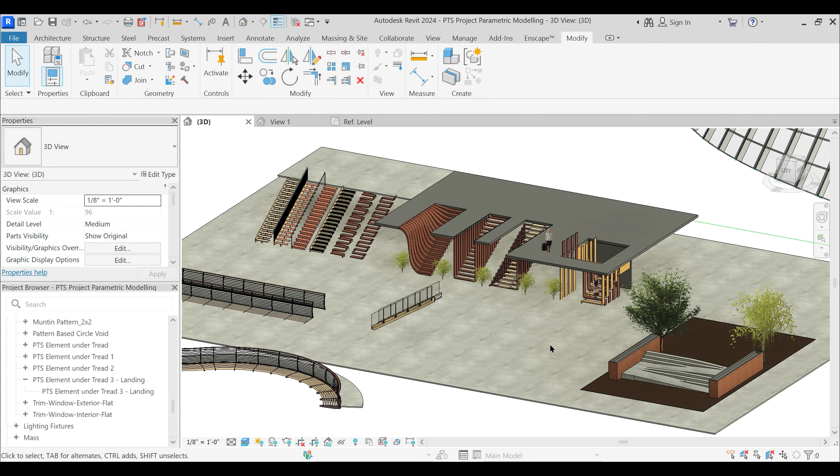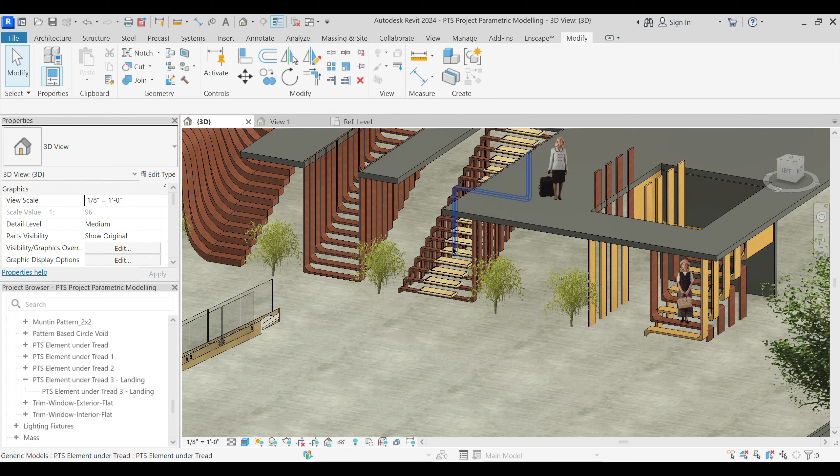For the architectural segment, I have already shown you in class different types of staircase, how to create these different types of staircase using modeling skills and different template files of Revit. Fine, but while in this process, you always update and learn new things. So I have recently just discovered this different type of staircase using the same template file with the help of which these two staircases have been created.

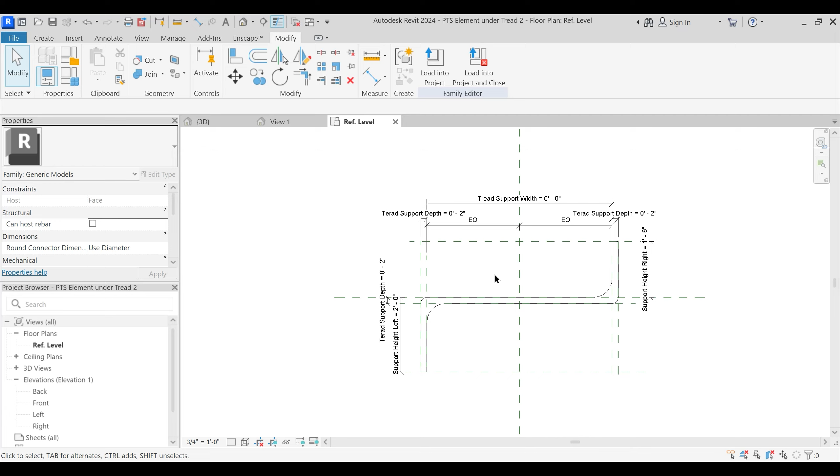That is the face-based family, but using a slightly different modeling skill. For example, if I just take you to this particular edit family, then what you see is that this is also a face-based family which has been created while assigning and constraining it with several dimensions and parameters, and then that particular file has been loaded to the project environment and used in a slightly different way to create this particular type of staircase.

So that I'm going to show you today from scratch. So just watch the entire video till the end. And if you think that this video was worth it, then kindly enroll for this course and let's learn together and let's grow together. And now without wasting a single second, let's jump into the interface of Revit.

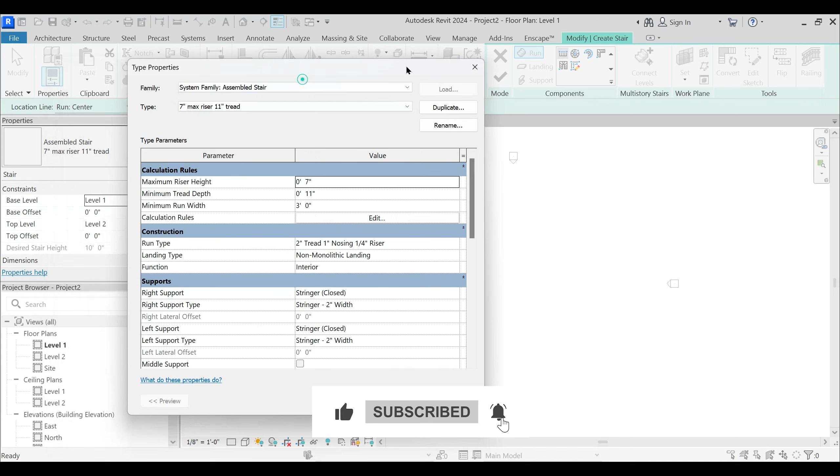Let's open a fresh new project file wherein I'm going to show you that particular staircase from scratch. Fine. So I will just click this particular stair command and we are just going to use this assemble staircase that comes with Revit. But I'm just going to say that I don't want the right support, neither the left support, and neither the center support.

And also for this run type, I'm just going to say that I don't want the riser. Yes, and I want this to be tread thickness 2 inch. That's fine. Tread profile default and nosing length 0. Fine. And with this customization, apply and OK.

And apply and OK. I'm just going to create a simple dogleg staircase with two flights, that is 1, 9, and here in this also.

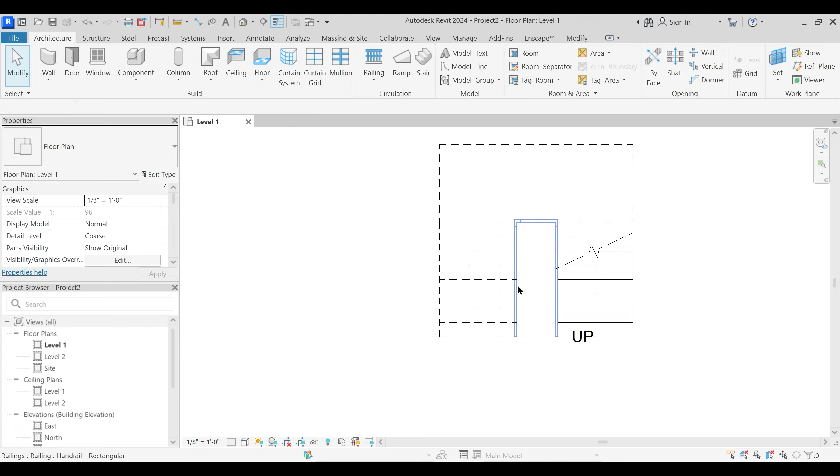Okay, and we are just going to create that particular staircase. And what I'm going to do is that I'm just going to use this particular staircase as a reference to create the one that I just showed you.

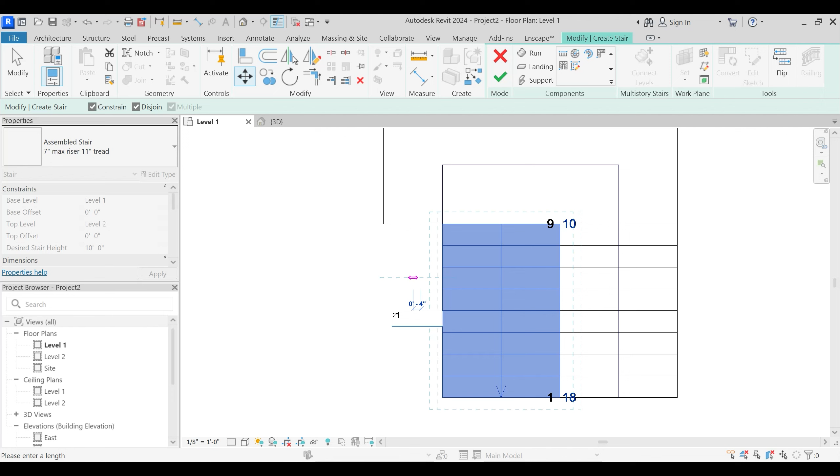So I'm just going to level 2 and edit stairs. And I'm just going to take this flight and move it just 2 inches away. Yeah, that's fine. This distance should be 2 inch. Yeah, okay, that's okay. And I'll just edit this particular landing and just bring it here and flush it. Fine.

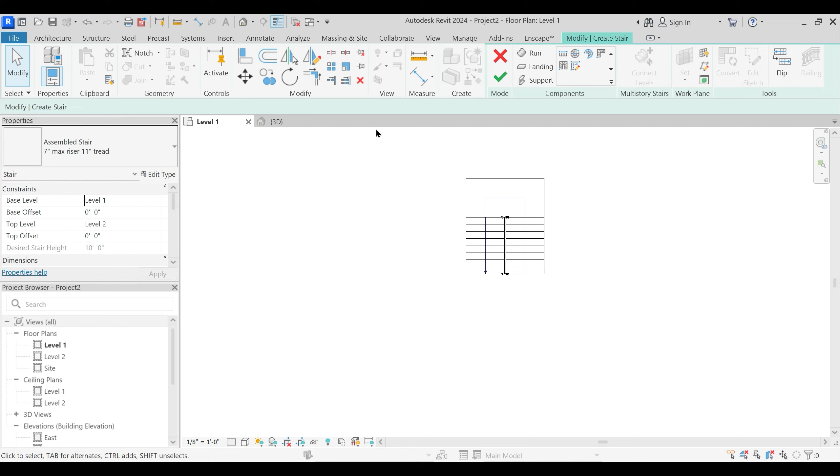Okay. And now we are going to create that particular stair element, which we are going to reference onto this particular staircase. Fine. So I will just go to file and new and family. And this is going to be a face-based family template, English Imperial. And again, just generic model, face-based. Fine. It is just going to be a face-based family.

Okay. So if I just take you to this particular 3D, and this is nothing but just a box showing this particular face, which you cannot delete. But what we are going to do is that we are going to model onto this particular face in plan while assigning several parametric formulas and constraining and giving dimensions.

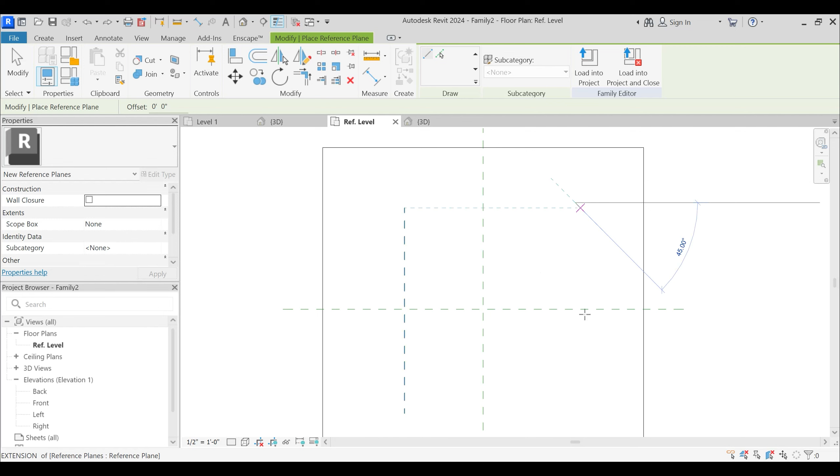Okay. So let me just draw a couple of reference planes and also one over here.

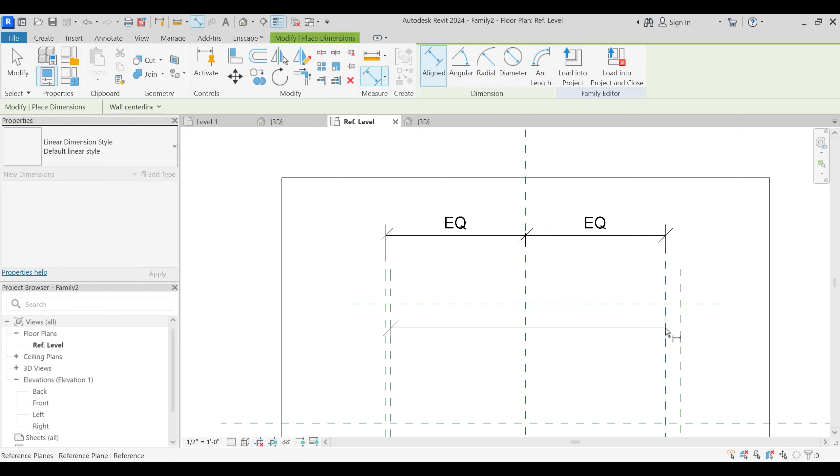Okay. Now I'm just going to dimension them. Let me just do 1 to 2, 3, and equals, and 1 overall. And let me just scale down a bit. Okay. And this is going to be stair element width.

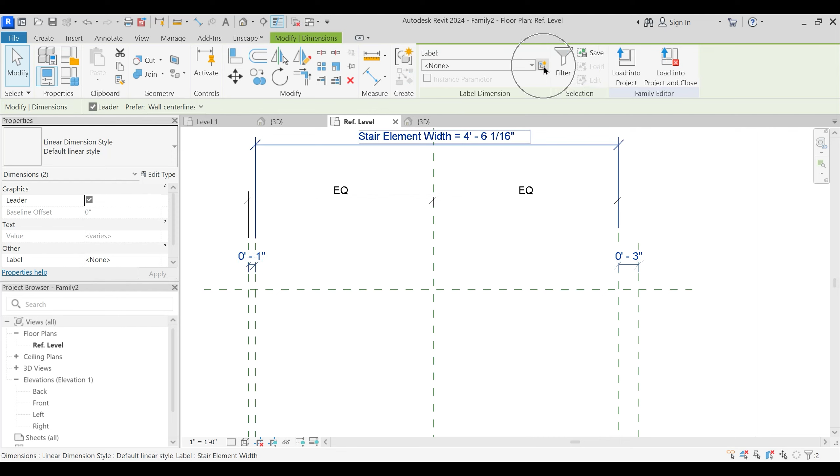And this 2, 1 to 2, and this, both of this are going to be stair element depth. Fine. And also this is going to be the same. Actually, this should be thickness, but since both of them are going to carry the same dimension, so I will just give it that stair element depth.

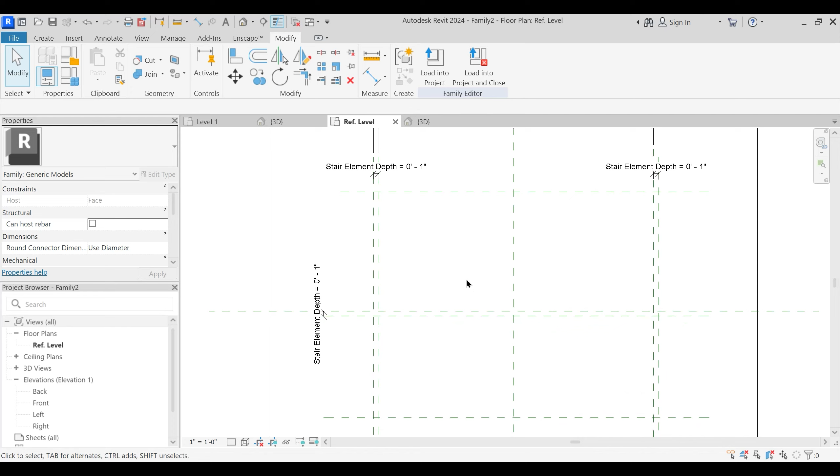Okay. And I will just strike one more parameter. And this would be, actually, let me just confirm without proceeding further. Yeah, that's from here. Okay. And that should be stair element height left, because it's my left.

And very important, okay, fine, we'll do that later. And stair element height right, because it's my right.

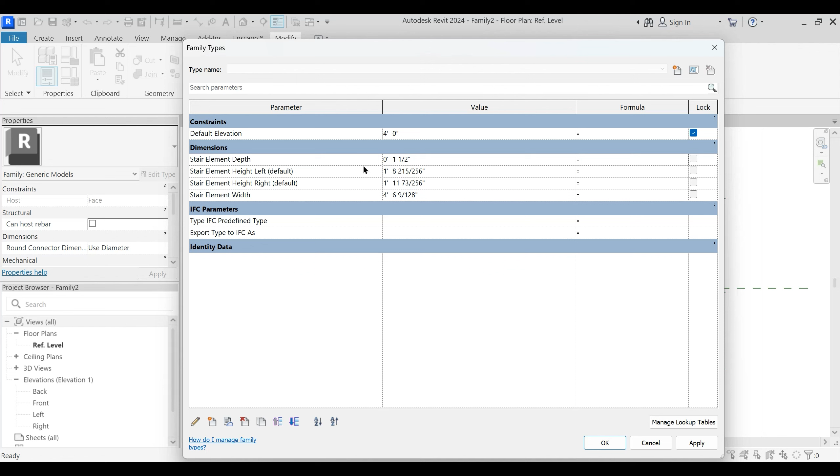Fine. And I'm just going to change both of this, right and left, these two parameters to instance parameters. The reason I'll show you once we load this particular file into the project environment, why these two parameters are instance. Okay. And depth, I will just say that I want 1.5. Okay. And width, I will say that I want it to be 5 feet.

Apply and okay. Fine. Now onto this, I'm just going to create a simple extrusion. So set work plane, and that would be the reference level. Fine. Since we are creating on that particular face, the face of that wall.

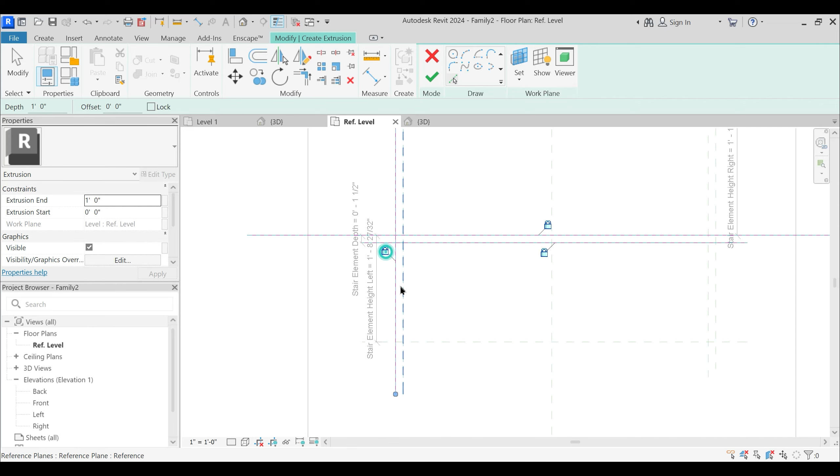So extrusion, and just create one and lock, two, lock, and I will just lock all of this to that reference planes. Fine. And also let me lock this. Yeah. Okay. And just have a close shape.

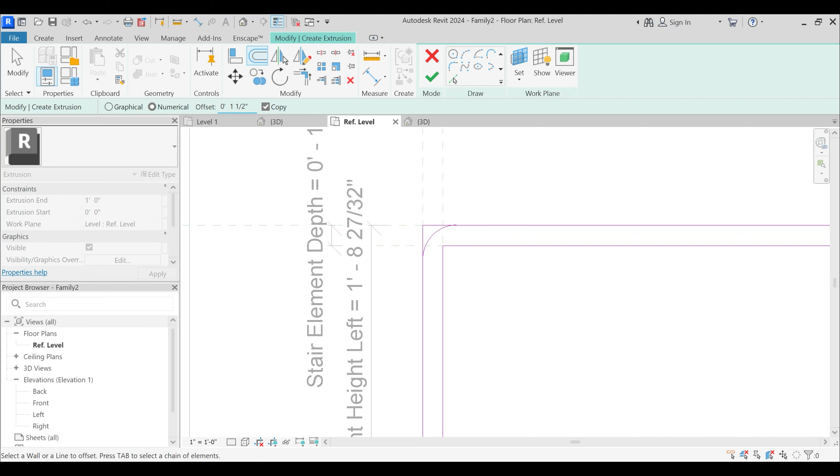Okay, what we want is a little bit of curvature onto this particular portion. So what I'm going to do is that from here till here and just a little bit of curvature. Again, offset 1.5 because the depth is 1.5

and offset it on this end. TR, okay, and select both of this and DM, that is mirror from this point, and also we need to mirror it. It got removed from here.

Okay, fine. Let's draw one line here and let's also draw one line here, which we are going to use in order to mirror that particular thing. DM, and with copy checked, I will just mirror it here, and then while selecting this, I'm DM and mirror from this point. But this time I will uncheck this copy.

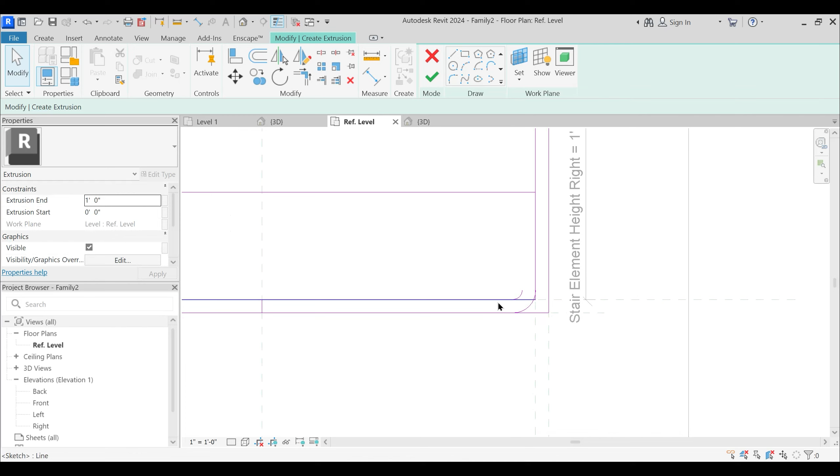Okay, fine. And I guess that we need to move it. Okay, and TR and fillet and just complete this shape.

Okay, with this I will just set extrusion 1 to be 0, extrusion start to be 0, and extrusion end to be 1 feet. And that's fine, we have created that particular stair element.

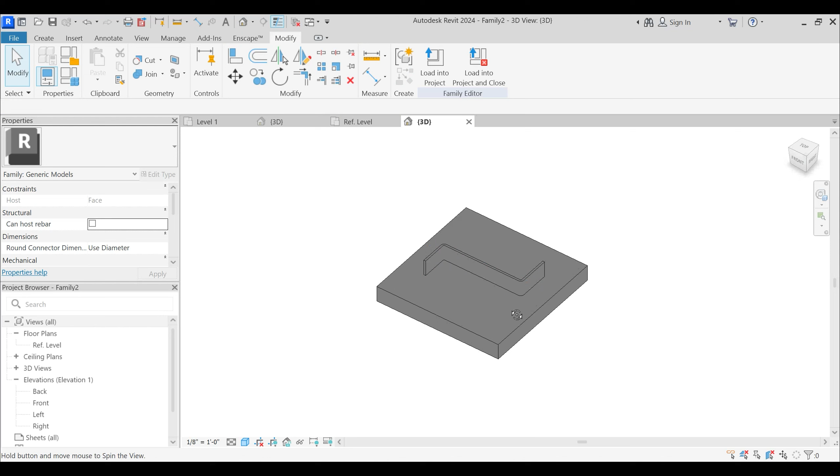Fine. What I'm going to do is assign the material and tread element material, and I'm also going to create an instance of that.

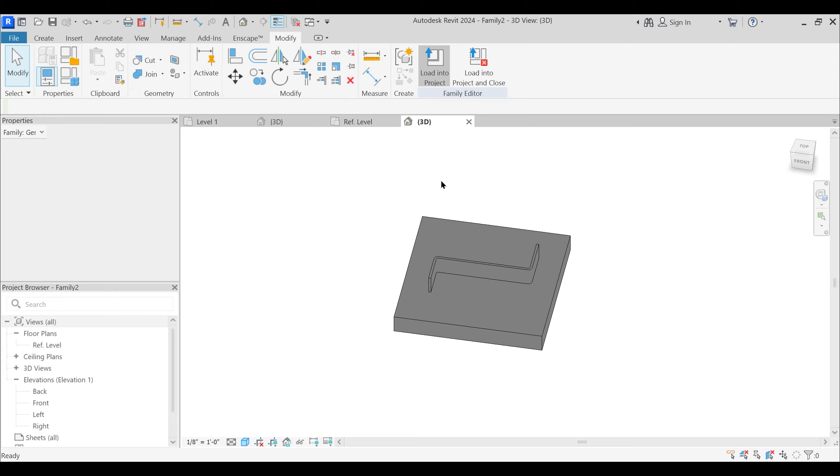Now this family once created, I will just load it into the project. You see that you cannot just place it just like that. So I will just close this since it has already been loaded in the project environment.

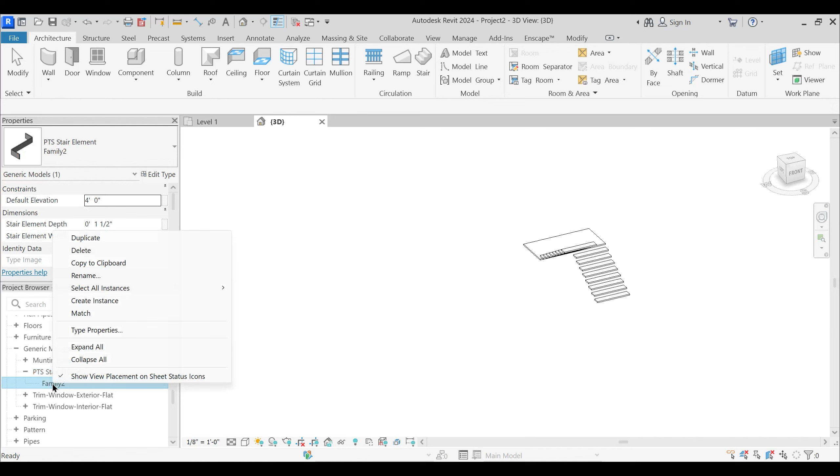Now I'll go down, expand this family section, and under generic models I should be able to find that family. I will rename it PTS stair element, copy it, and rename it here as well.

Now what I'm going to do first is go to level 2. This is level 2, and I'm going to create one simple floor, not roof, floor architectural, edit type, and change its thickness to 6 inches.

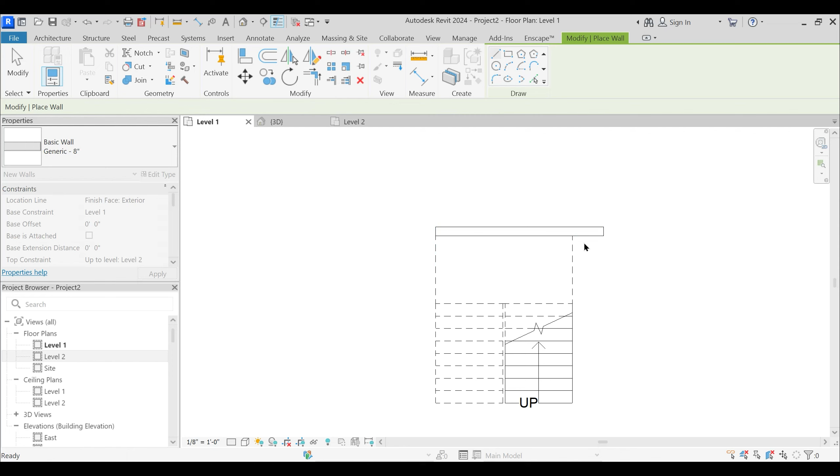Apply and okay, and here I'm just going to create that simple floor. Let's see it in 3D. Also I'm going to create one wall from location line finish face exterior, from level 1 to level 2, and simply create one wall.

Now with this, I'm going to take this particular stair element, drag it, and place it on face or place on work plane. With place on face selected, I'll press space until it's flipped the direction and it is exactly snapping to that particular face.

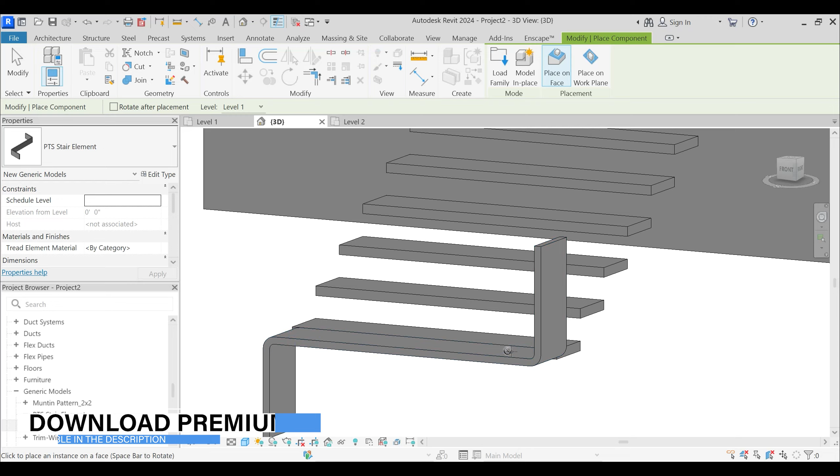If I select this particular thing, you see that this tread element material is now an instance property which I can change instantly. So I'll create wood, plywood sheathing, and assign that material so we can have a differentiation.

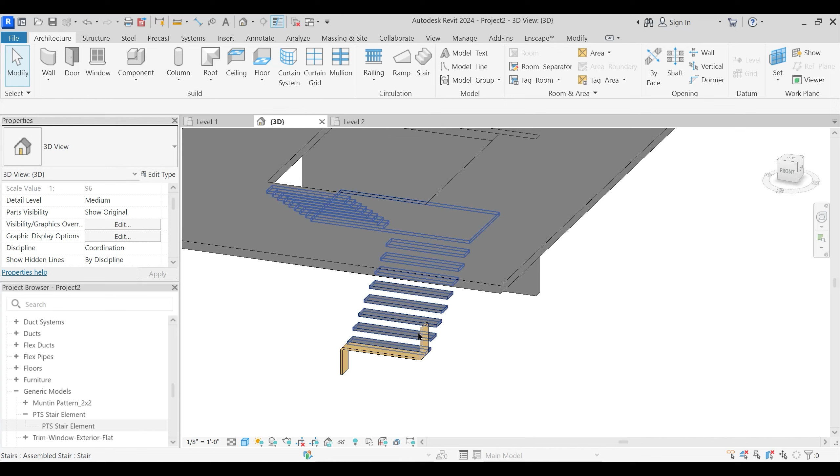Now I'll go to level 1 and take this particular element and displace it, but we cannot see this edge. Yes, let's drag this.

Okay, fine, just select this and move, and with constraint unchecked, first move with this direction, then move it again with constraint unchecked, since this is a face based family, so every time you displace it you have to do this.

But for this particular staircase, if I go to edit type, what you see is the tread depth has been 11 inches, so let me just keep it 12 inches. That will expand and we don't have any problem.

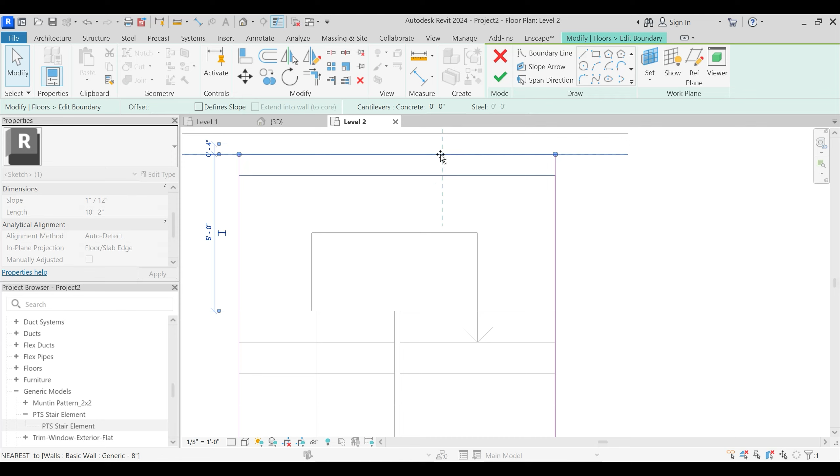Okay, fine, and also in level 2 this will change. Don't attach. Yeah, that's fine, and let's go back to level 1.

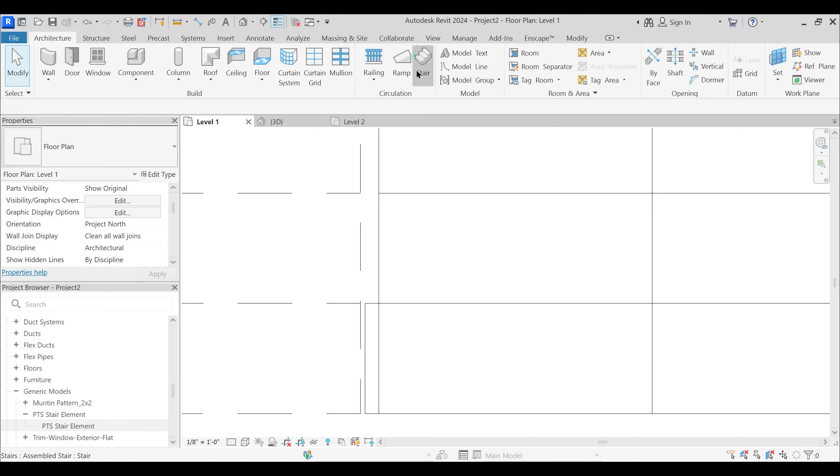Now this should be able to, with this wireframe, move it from this point to this point. Now what you see is that this distance was kept 2 inches, but I guess we again need to edit that staircase.

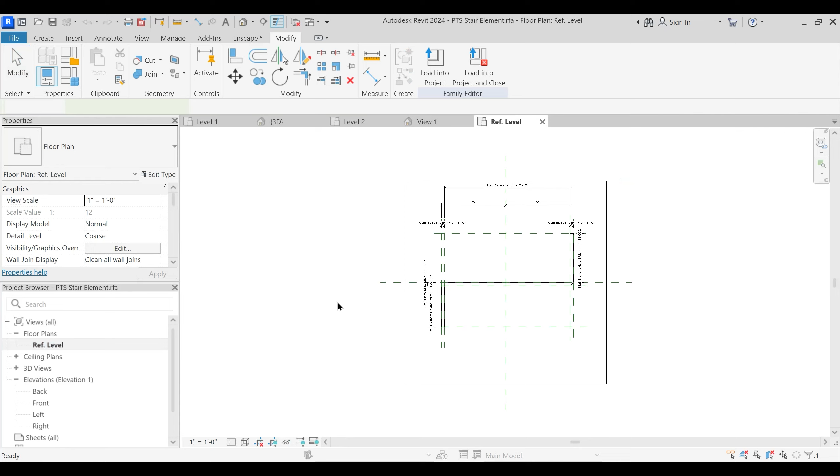Because in this family, in this particular project and template file of Revit, we have assigned this parameter a thickness of 1.5. Stair element depth is 1.5, so the overlap is 1.5 only.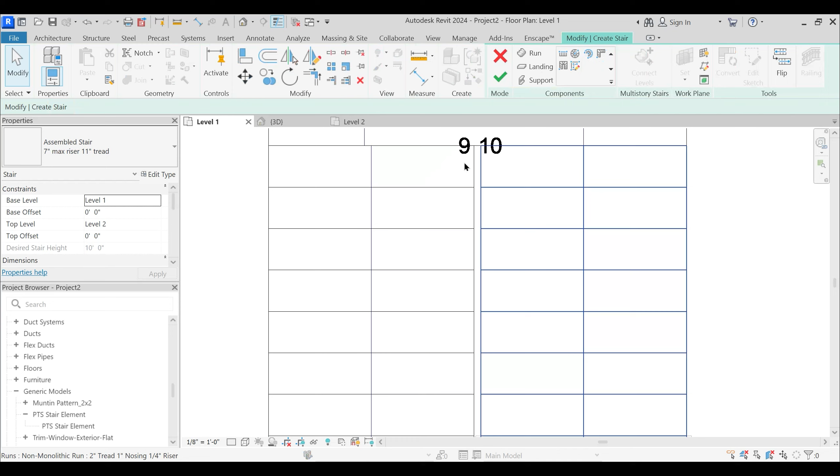So what we need to do for that particular staircase is edit stairs again, select this flight, and move it half an inch, 0.5. Yes, and this should now only be 1.5.

Yeah, that's fine, and also edit this sketch. We are anyway going to delete this once we create that staircase. But delete and trim, and join this to this.

Also have that, and move it from this point to this point. Yes, and just finish, and finish.

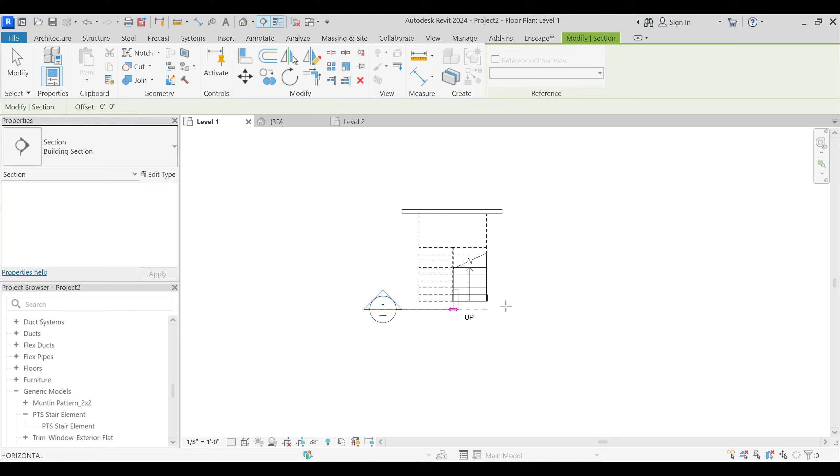Okay, now, yes. So now I'll just go to level 1 and take a section from here, and if I take it to a particular section, then what you see...

...is these drag handles on all 3 ends, suggesting that this particular family, if I go to edit type, you remember these 2 parameters, stair element height left and height right, were given an instance parameter.

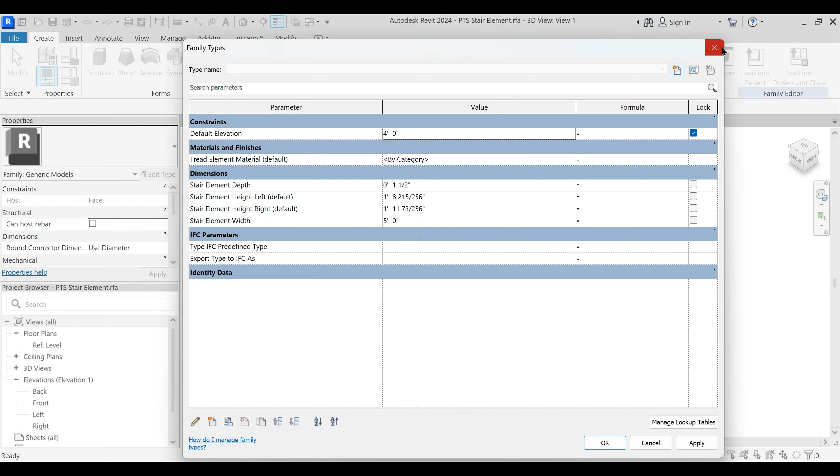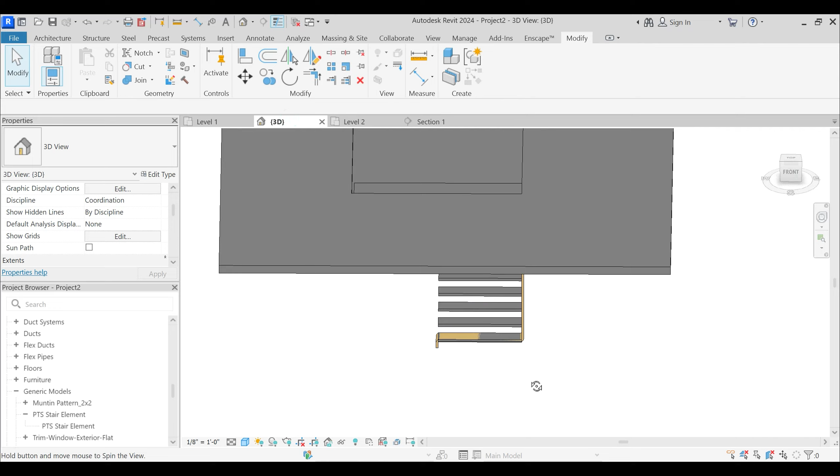The reason for making that an instance parameter was that, while in this project environment, I can associate this particular height with whatever I want and change it instantly. So see, both of these parameters are instance parameters. Now I'm going to drag this element a bit up and this element a bit down. Fine. So now if you look in 3D, you see that the first stair element has been created.

Fine. Now we need to create the opposite, I mean, the first step of the other flight here. And we have to move step by step and very slowly. So how are we going to create that? I'll just go to level 1, select this particular element, and DM, that is mirror, and I will mirror it from the center. And this time I will say copy. With that, I will just copy that particular element. Let's go to 3D. Fine. So that has been created.

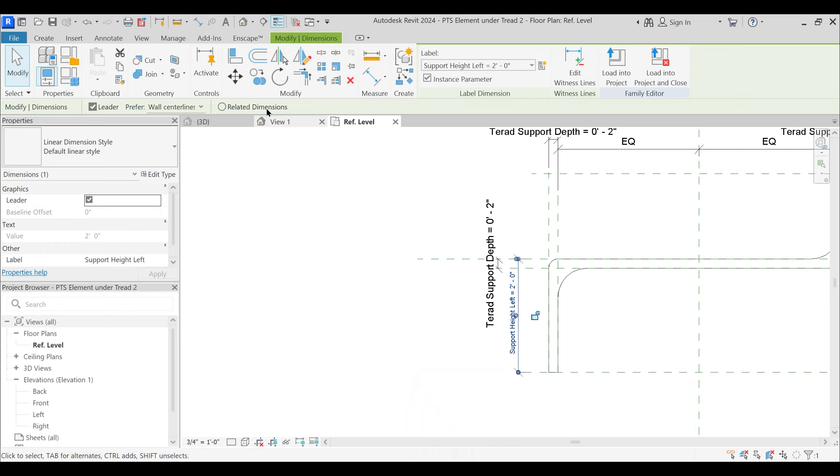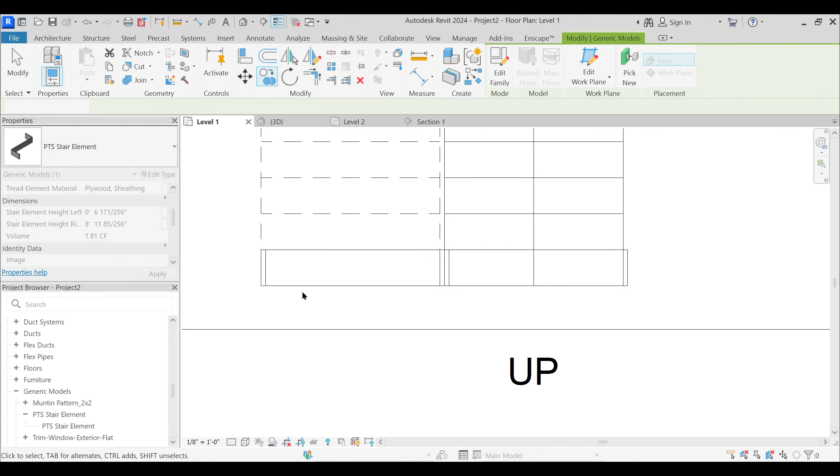Okay. But let me just check once. The first element should be, yeah. Okay, fine. So actually, it will not be a mirror, but this same element will come here. As far as the modeling part is concerned, the same element is going to come onto this, but we will edit its height. So with constraint, I'll just move it from this point to this point. Okay, fine. And now let's go to section 1.

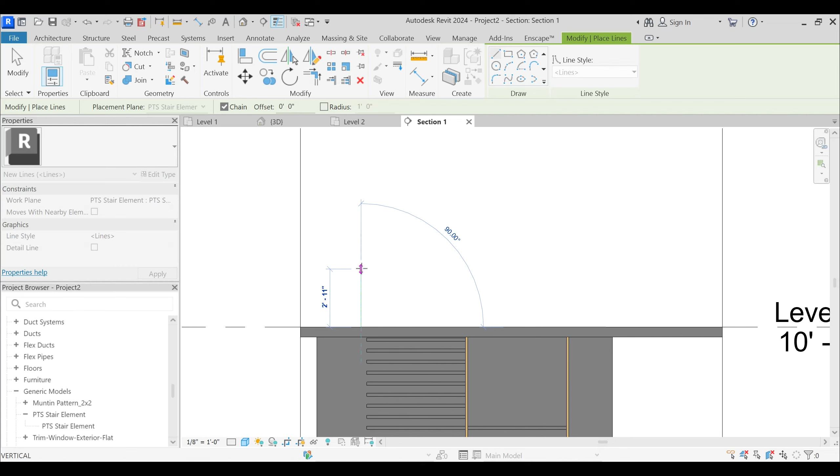I'm going to level 1, architecture, set plane, pick a plane, pick this particular plane, go to section 1, and draw a line which is 3 feet high, which is a typical railing height. And I'm going to drop a reference plane so we can snap 2 elements. Then I'm going to move this part: I drag this center, and with constraint unchecked and disjoin checked, I'm going to move it from this point to this point.

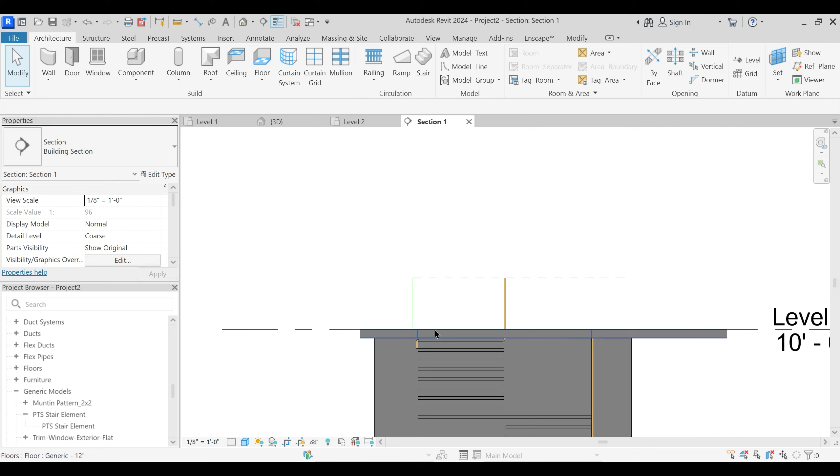And this should snap here. And I guess I was supposed to mirror it. No, that's proper, but this element will drop down. Sometimes I forget, so just pardon me. Sorry. Okay. And this element will drop till this end. And that's how we have created the two stair elements for both the flights.

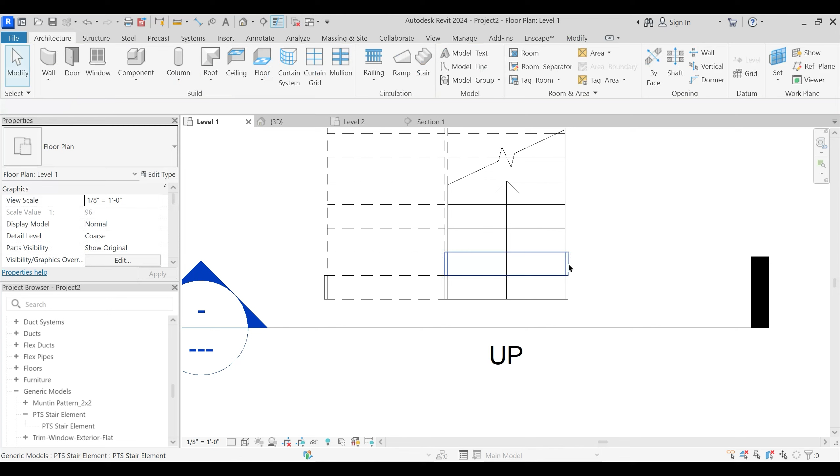Now we are going to create the second element, and we have to move step by step. So, level 1, CO, and copy it from here to here. Now, this is going to have a different formation. So I'm going to go to level 1 and DM, and with copy unchecked, I'm going to mirror this from the center. Okay. So with that, this particular element has flipped.

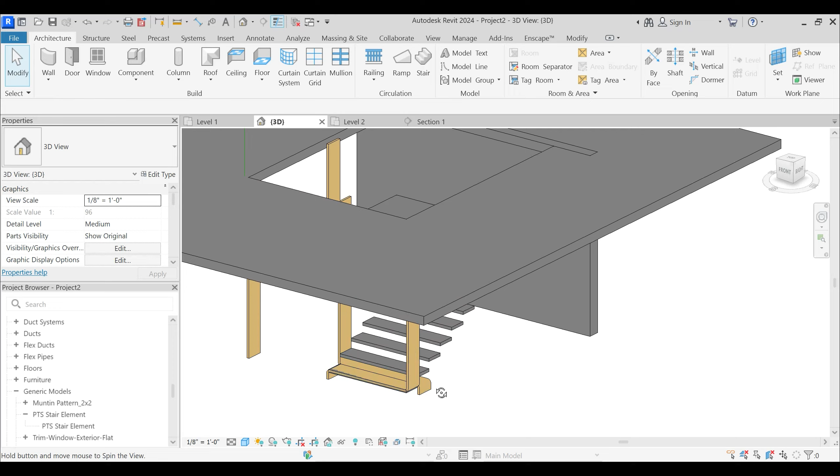And I'm going to give a different material to this so we can differentiate it. I will call this wood, and I'll give it a dark material. Apply and okay. So we can just have a differentiation.

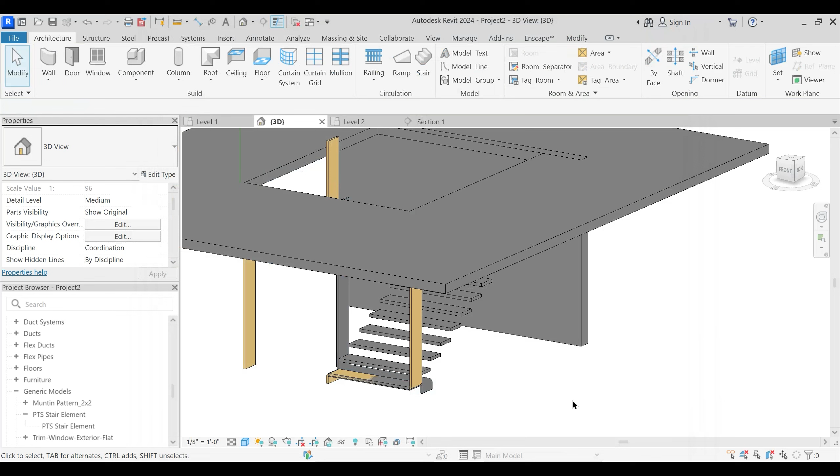Now we need to go to section 1, and just pay attention because it is going to be really confusing. Select this particular element and move it from this point to this point with disjoin checked. And slightly bring it somewhere over here. And this element will drop till here. So you see that particular element has been created, but now we need to create the same element on this particular flight.

So before copying it, let me just check what it would be. Yes, that would be the same. Okay.

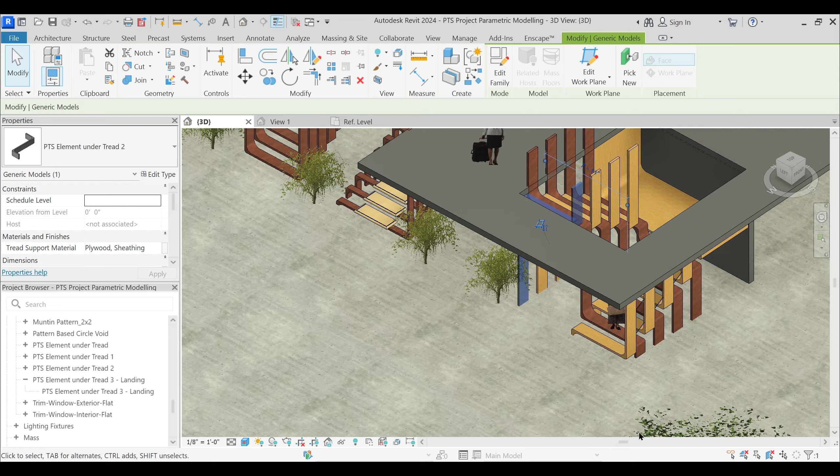The same way, you have to copy it, but just play around with the height. You can easily create this particular staircase with extrusion in Google SketchUp. But then if you have to draft each and every profile of these stairs and create it that way, then what is the use of Revit? Fine.

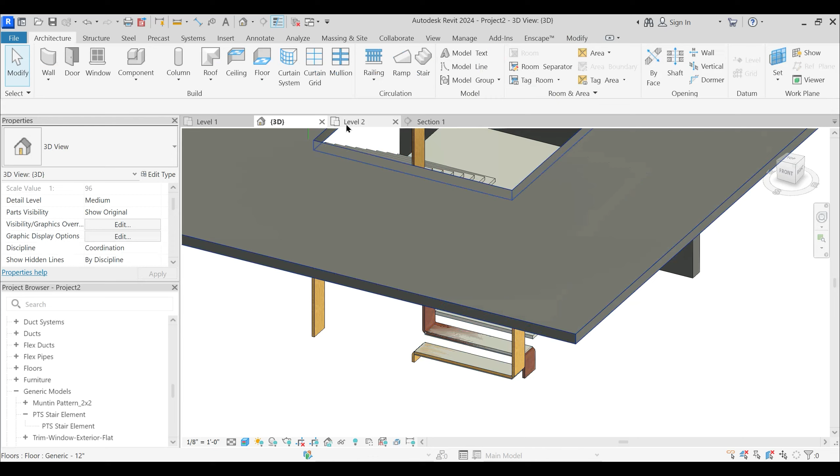So just select this particular element while in level 1, just select this. Okay. And CO, and copy it from this end to this end. Okay. I just need to move it a bit. Okay. And go to section 1. And with that selected, first just HH this element so there is no confusion.

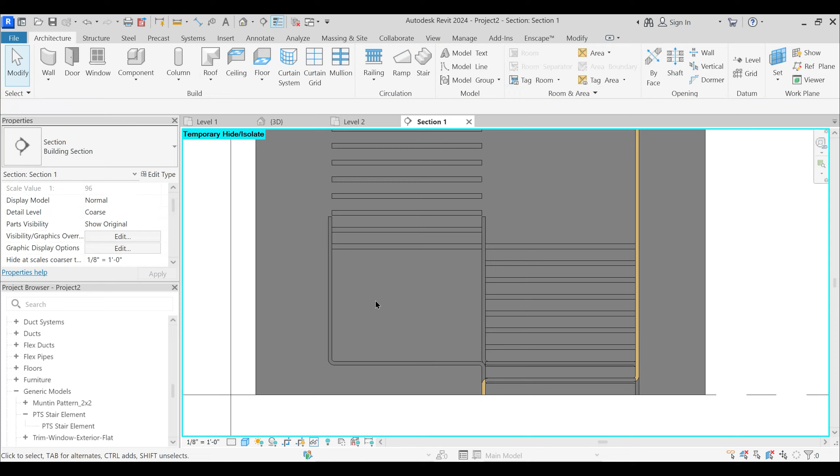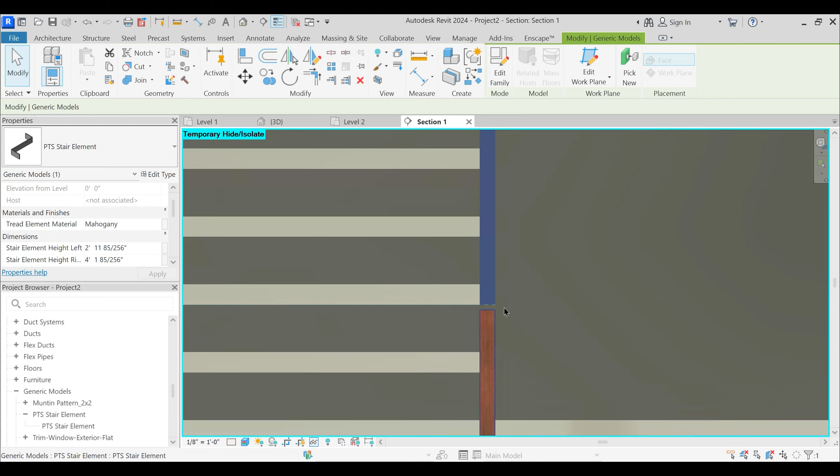R, enter. Okay. And with this selected, you see that we are just using this stair as a reference to place these stair elements. Okay. And move it from here to here. What we just need to do is snap it to this reference plane, and here I will just drag and merge these two elements. And yes.

Okay. And if I just go to 3D, these two elements are overlapping, but those should be perceived as one single element. In order to perceive it as one single element, you just need to join this to this. Fine. And that is how that particular stair element has been created. And now if I just select this and HH, you see we have created those stair elements,

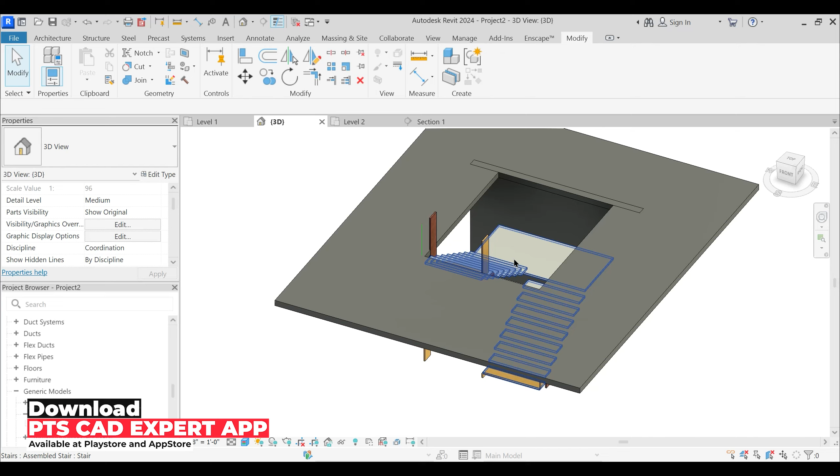both of them. Fine. So now we just need to copy these two stair elements at various levels and create the entire staircase with the help of the same. So I'll just show you for one of them, and then the rest you can do on your own because it's time consuming. So I'll just select all 4 of these, CO, uncheck constrain, and copy from this point to this point.

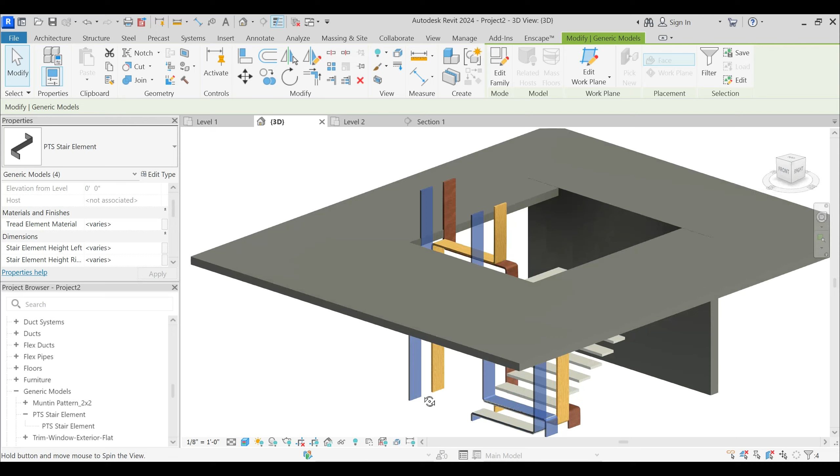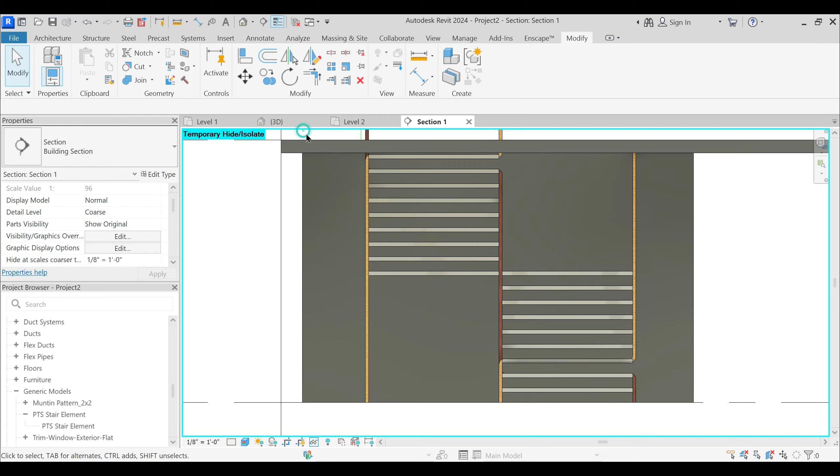Okay. Now these 4 elements which we just created first, I'll just go to section and hide them so that we don't have any confusion. Fine. So first is this element, move it from this to the third step, just drop this down and drop this down as well. Okay. And this particular stair, I guess I have missed something. Yeah, okay, that's fine.

This is fine. Okay. We just need to move it from here to this part. Okay. And change its dimension here. And also you see that these are instance parameters, so we can edit them instantly. And the last, this particular one, see, these are properly placed. Fine.

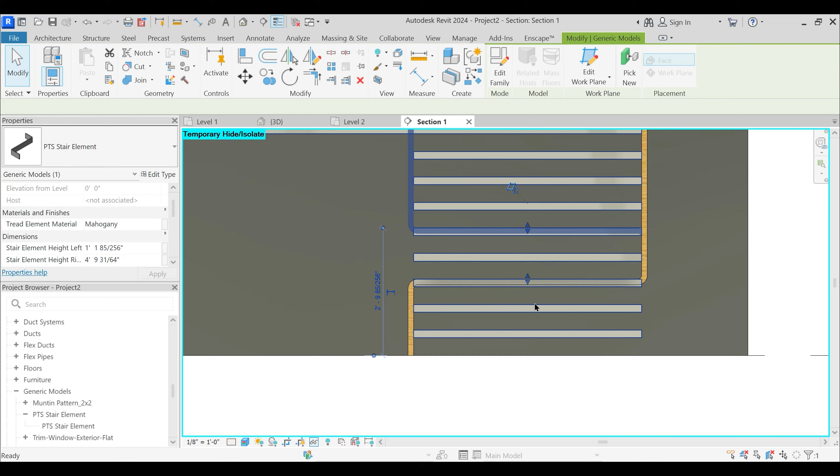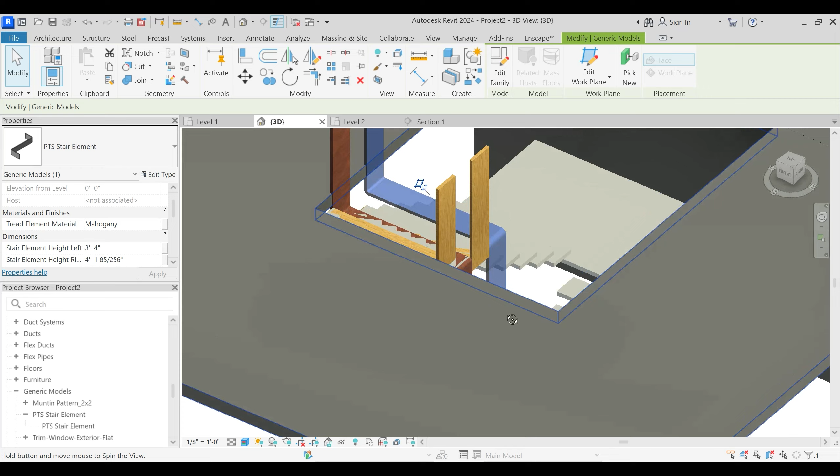So in this particular one, first we need to displace this. So with that selected, go to section 1 and move it from this point to the fourth step. I guess I selected the wrong element. 3D, and with this selected, go to section 1 and move it from this to 4. Okay. And just change these instance parameters. You can see the drag handles, drag it a bit till here, and likewise select the corresponding element on the other flight, section 1, and move it from this to the fourth step.

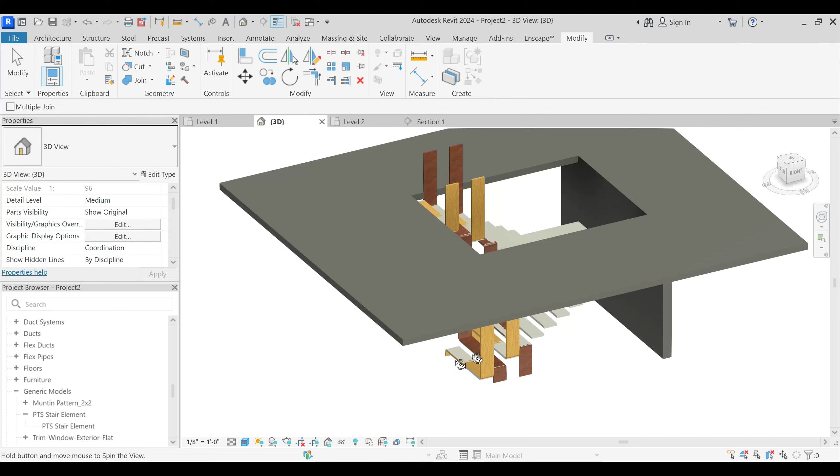Just need to drag this, and also drag this a bit, and go to 3D, and we will see that these two elements overlap, so we need to join 1 to 2. Okay. So that is how you create all the elements of this particular staircase. And finally, once created, you just delete that particular staircase.

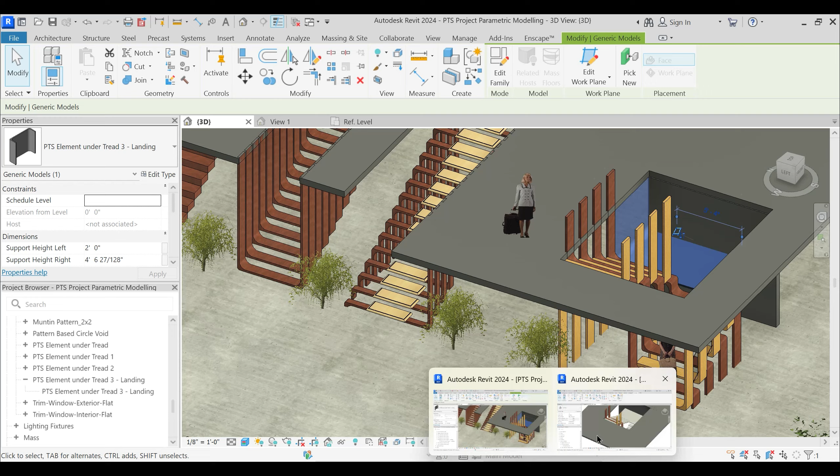Fine. One thing I would like to bring to your notice: what about this landing? For that landing, you just need to edit this stair element to a slightly different configuration. See, this is that particular stair element. So I'm just going to use any one of these and go to level 1, and let's select this, CO copy, or let's first go to edit family and edit that.

Okay, and reference level. I'm just going to get rid of this parameter, then edit extrusion, delete this entire chunk, and DM this from center with copy. Oh, supposed to keep copy checked on, and with copy checked on, fine. Move it from this point to this point, and actually we should have mirrored the entire thing. Anyways, align and lock.

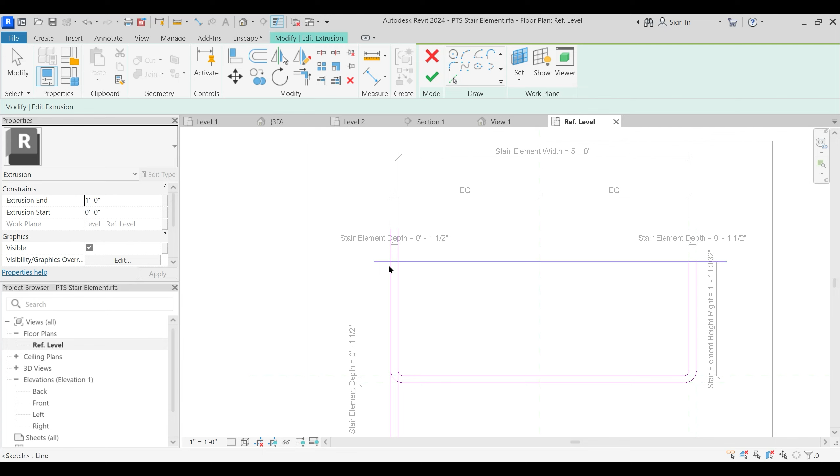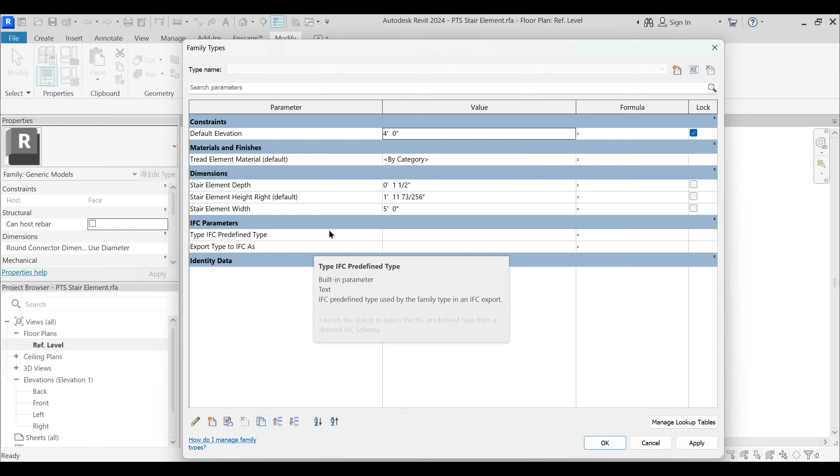Yes, the highlighted lines overlap, but that's fine. We can just trim once, that's okay. TR and join this to this. Fine, and have a closed shape, and just delete this reference plane and also delete that parameter left, because we don't need it anymore, and we just have, oh no, we will need that, sorry.

But both of them will be stair element, right? Yeah, so we will just change that stair element height right to just stair element height. Okay, because that will remain the same for both of that.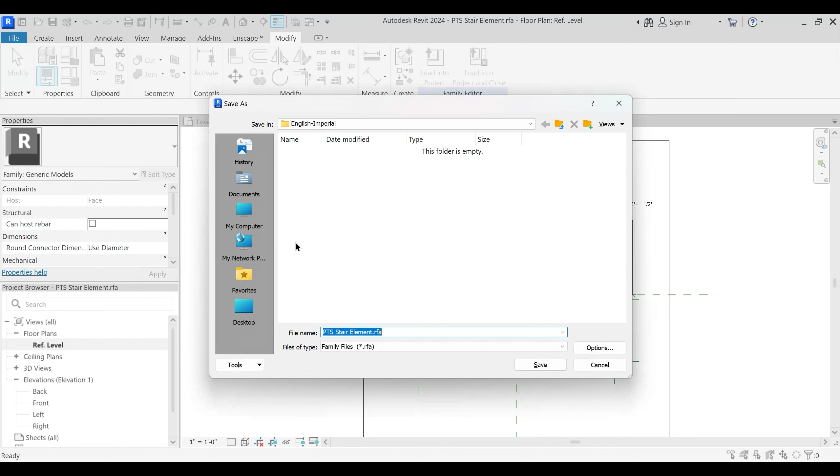Okay, and with that, don't forget to save this, make a save as, otherwise you will have conflict, since this particular template file, this particular file is already loaded. So we just need to make a save as of this and then load it into the project. Fine, you cannot just place it. So I'll just delete this. Also delete this. We don't need it anymore.

And I'll just go to 3D. Fine. And herein, what I'll do is that the stair element 1, which we just made a save as of, I'll just drag and drop. And herein, I will just place it on this particular face. Press space until you snap this. Okay. And herein, I will just go to any of the floor plan and move it with constraint unchecked. I'll just move it from this point to this point.

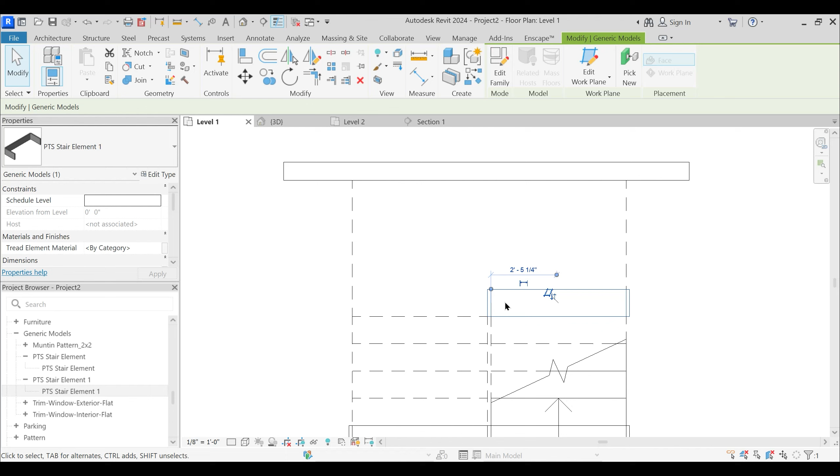But what's important is that now you should be able to displace this. So herein, I'm just going to go to stair element 1. And how much is this? 10 feet, 1.5. So I'm just going to edit type of this and stair element width to 10 feet, 1.5 inch. Fine. And apply and OK. And with that, I will just move this from this point to this point.

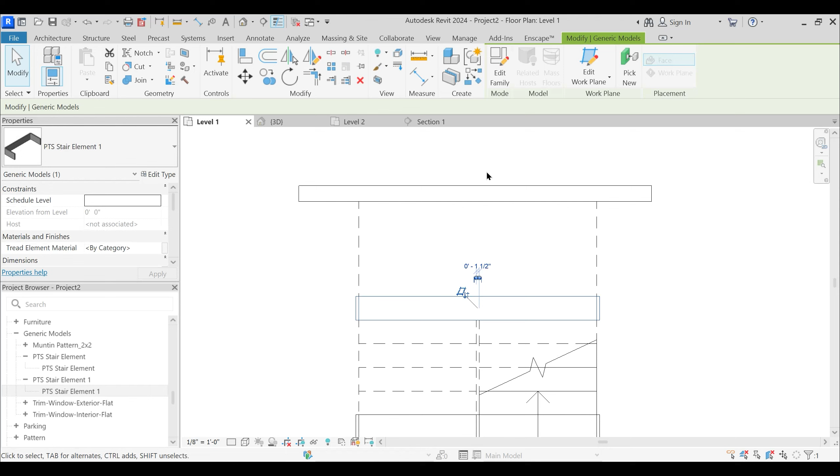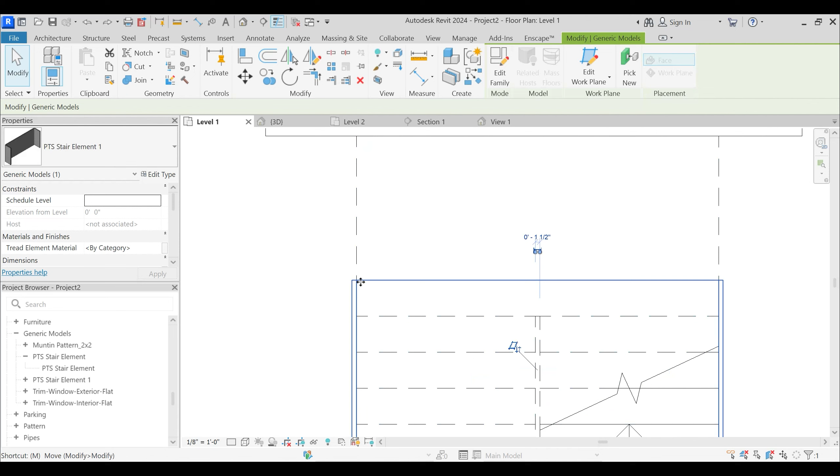Okay. And also this depth, not depth, but yes. So what we need to do, edit family and this extrusion, which is right now extrusion start 0 and extrusion end 1 foot. The width of that landing in project environment is 5. So I will just load that back into the project, making it 5 feet, and that will expand. You just need to position it properly, uncheck constraint, and move from this point to this point.

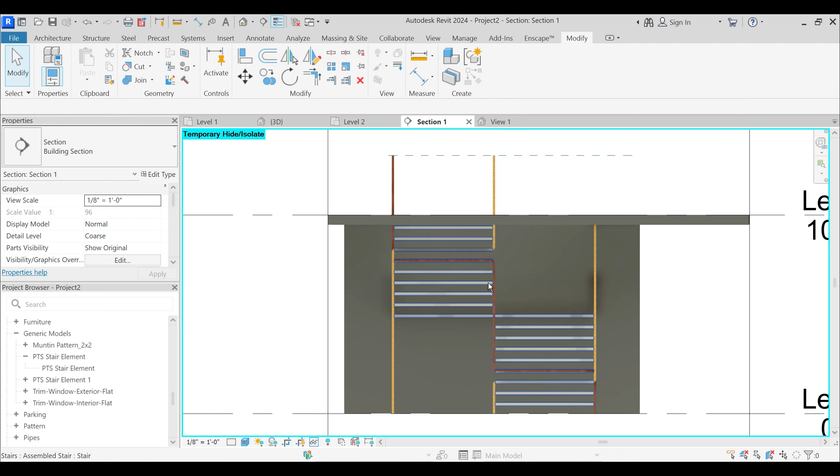Okay. And if you just go to 3D, then you see that that particular thing has been placed. Only thing is that you need to change the material in order to highlight it. Okay. And now coming to section. If you just select this thing, well, there are a lot of elements you're not able to visualize. So just select this particular thing and go to section 1. So you have these drag handles with that element selected.

So what you're going to do, you just need to drag this all the way till this height. Okay. The bottom of that slab. So with that, all the elements have been created and I'll just press H. Okay. And you see that this is how you create this particular interesting staircase. Fine. Also, you can host this particular glass railing while going to this.

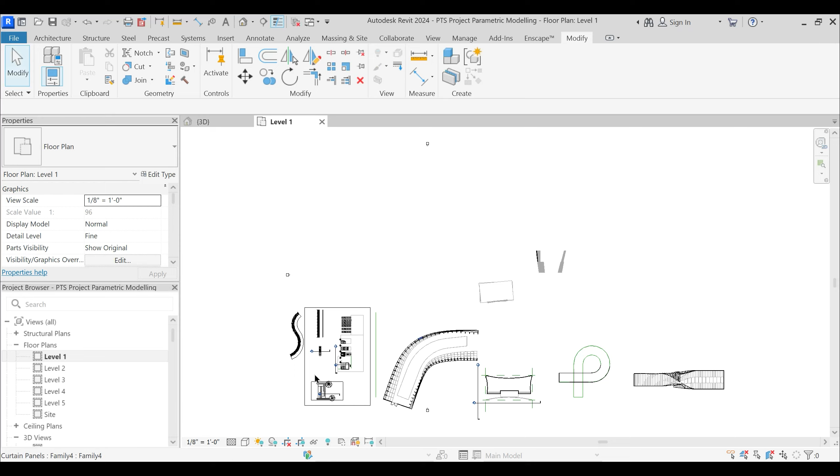Sorry, just go to the level 1 of this particular, and it has a lot of files. And how can you create this railing? Just draw a reference plane, and with that architecture and set and pick a plane, and with that just select this section, and with that section created, you just need to go to component and model in place and select the category and create that extrusion which I have created.

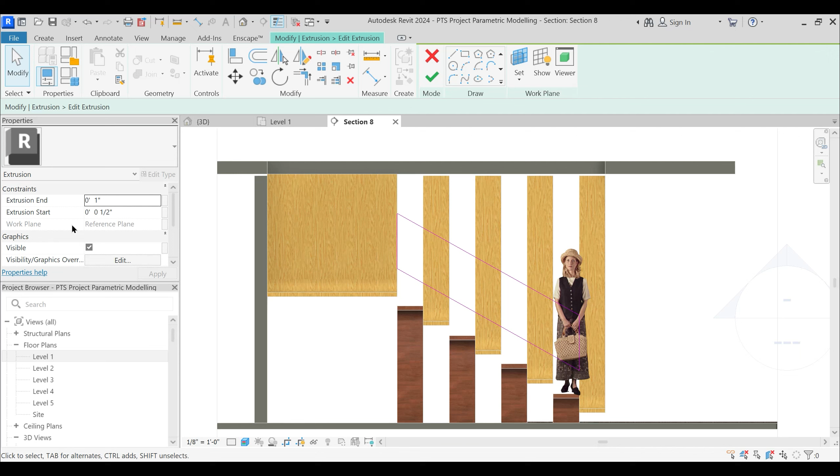Edit in place, and if I just select this, then edit extrusion, it is just nothing but a simple extrusion. It is starting from half inches and ending at 1 inch. That is half inch glass and this material has been applied.